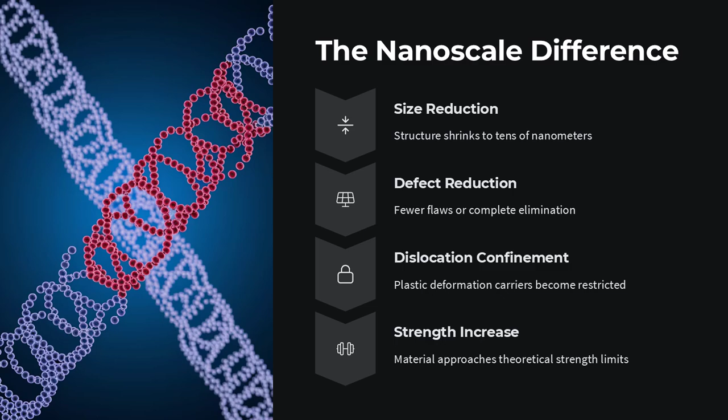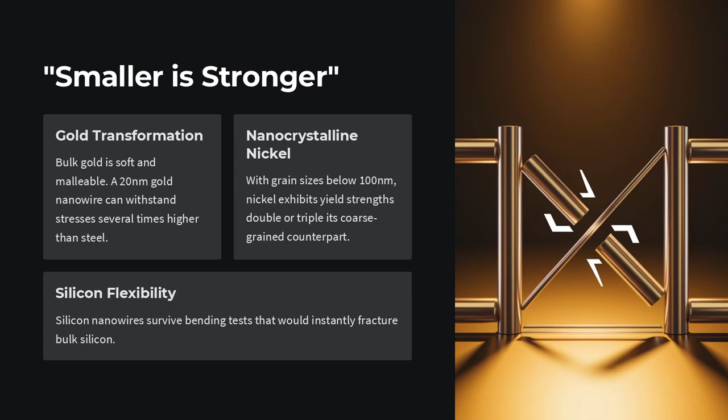But when you shrink materials down to the nanoscale, something remarkable and paradoxical happens. They get stronger, much stronger. In fact, nanostructured materials can exhibit mechanical strengths approaching their theoretical limits, far beyond what bulk versions of the same material can achieve. This puzzling phenomenon is known as the size-dependent strength paradox.

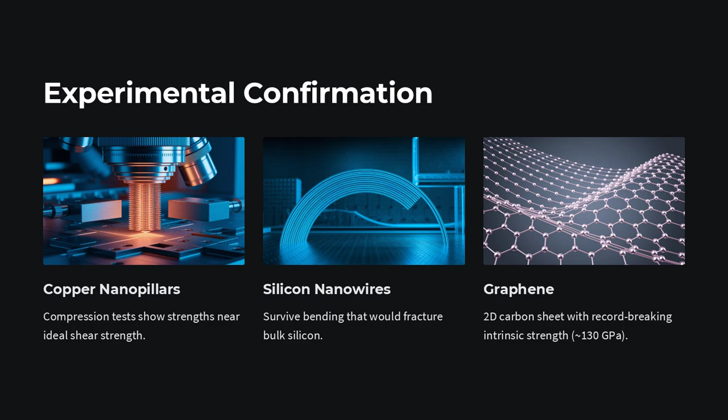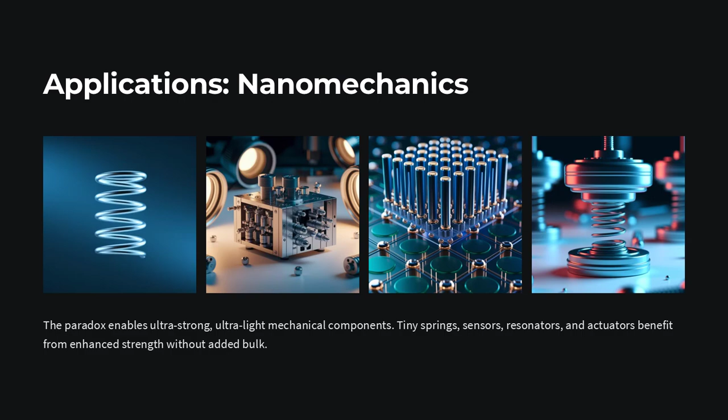Let's take a step back. In classical material science, we expect larger samples of a material to behave predictably, but in practice, larger materials often fail far below their theoretical strength. Why? Because of defects, dislocations, grain boundaries, microcracks, and voids. These imperfections act as weak points, places where stress concentrates and fracture begins. The bigger the material, the higher the chance it contains a critical flaw.

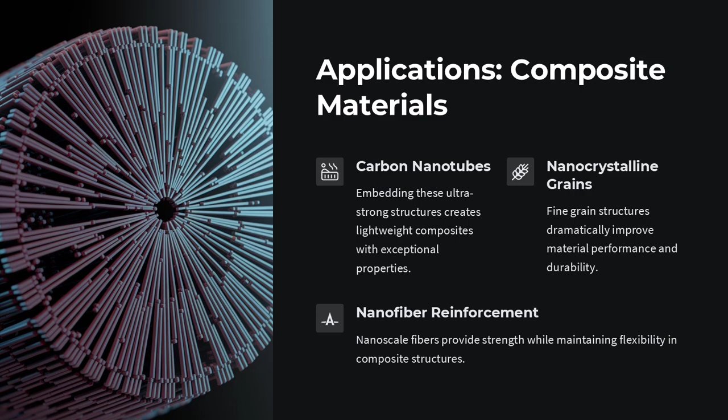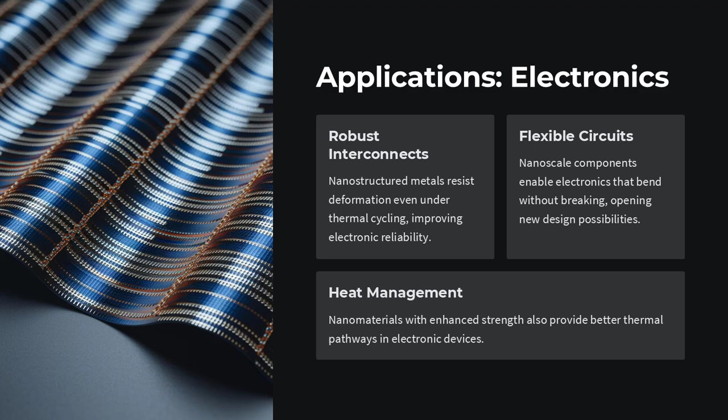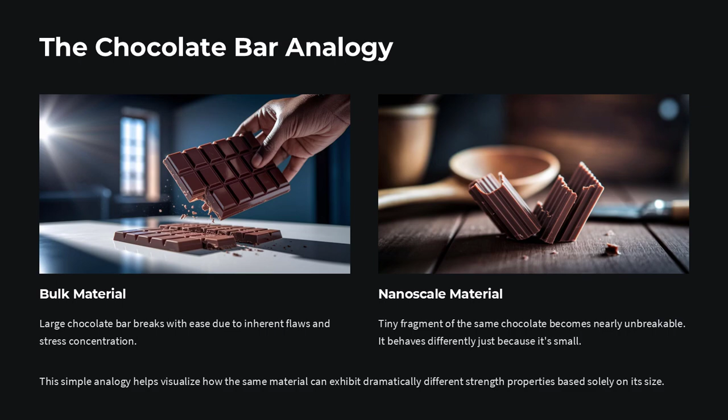This is why, for example, a perfect silicon crystal might withstand extreme pressures, while a large silicon wafer can snap from much less force. But now zoom in, way to nanostructured materials, nanowires, nanopillars, thin films, or nanocrystalline metals. As the size of these structures approaches a few tens of nanometers, something profound changes. The density of defects decreases, or they're removed entirely.

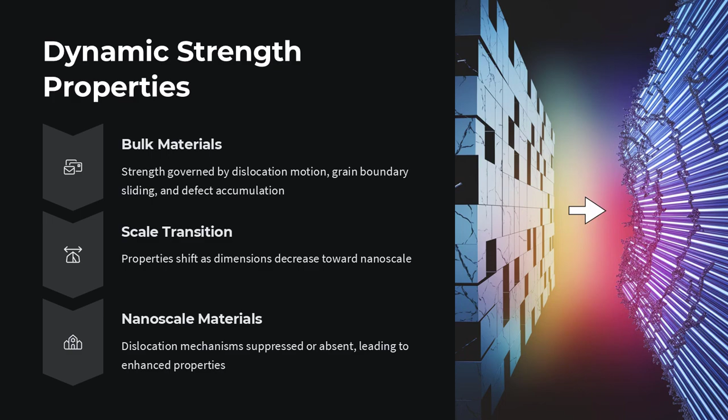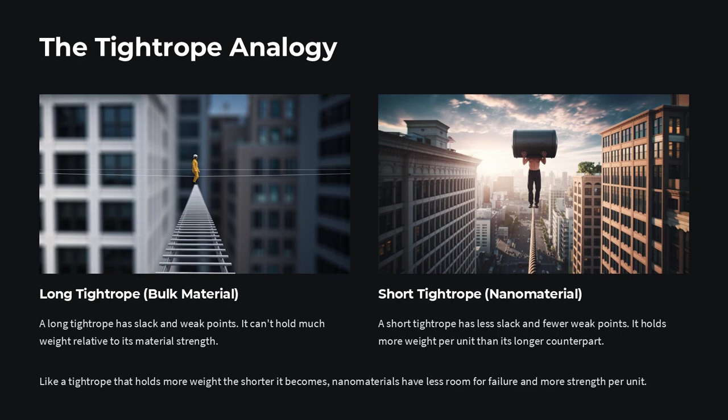Dislocations, the main carriers of plastic deformation, become confined, unable to move freely or even form. Grain boundaries may shift from being weak points to barriers that block dislocation motion, strengthening the material. This leads to a stunning result: smaller is stronger.

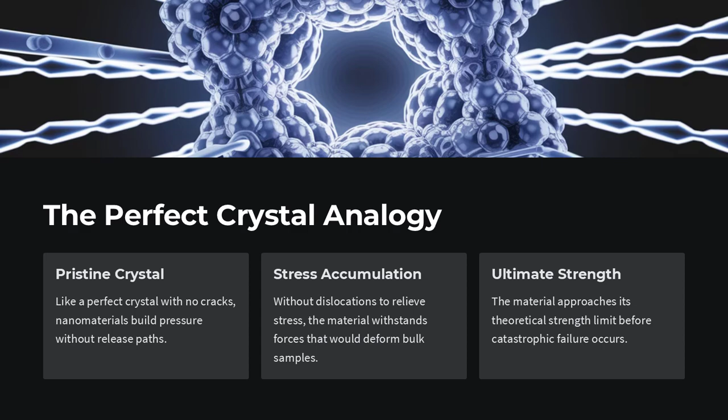Take gold, for instance. In bulk, gold is famously soft and malleable. You can dent it with a fingernail, but fabricate a gold nanowire just 20 nanometers thick, and it can withstand stresses several times higher than steel.

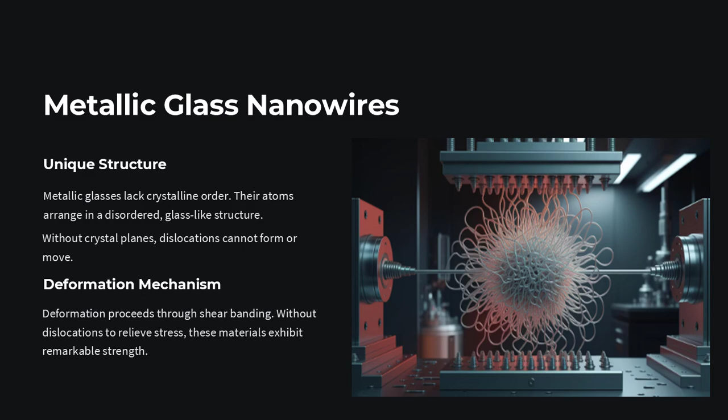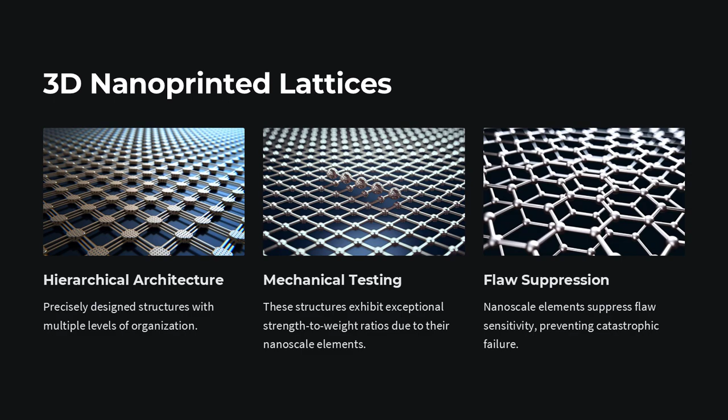Or consider nanocrystalline nickel, whose grain sizes are less than 100 nm. It can exhibit yield strengths double or triple that of its coarse-grained counterpart. These observations don't just challenge our intuition, they upend conventional design rules.

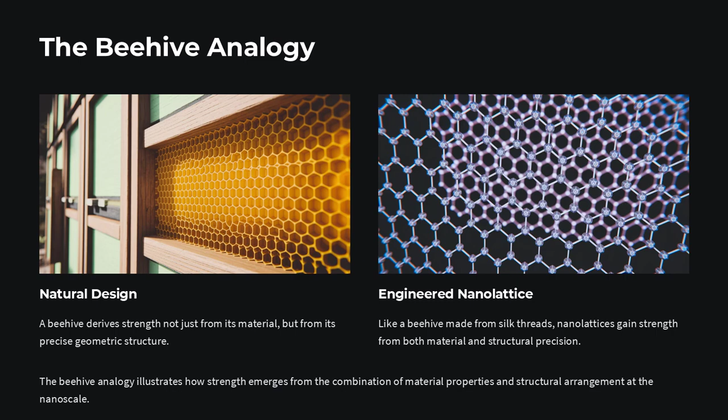You might ask, but shouldn't these scaling effects be predictable? Why do they seem to contradict bulk theory? Here lies the heart of the paradox.

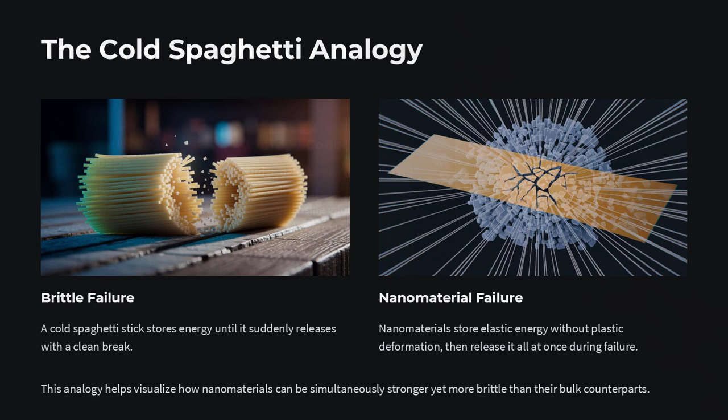Classical mechanics, including continuum elasticity and plasticity, assumes a homogeneous material full of statistically distributed defects. But nanoscale materials often have too few defects for these statistical models to hold. Instead of behaving like a material, the structure starts behaving like a system with discrete atomic behaviors.

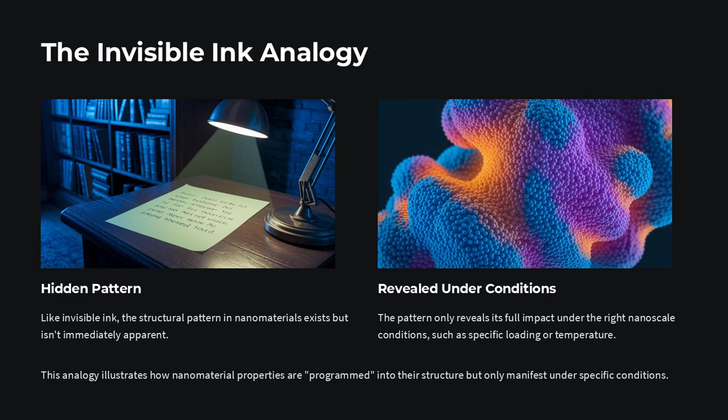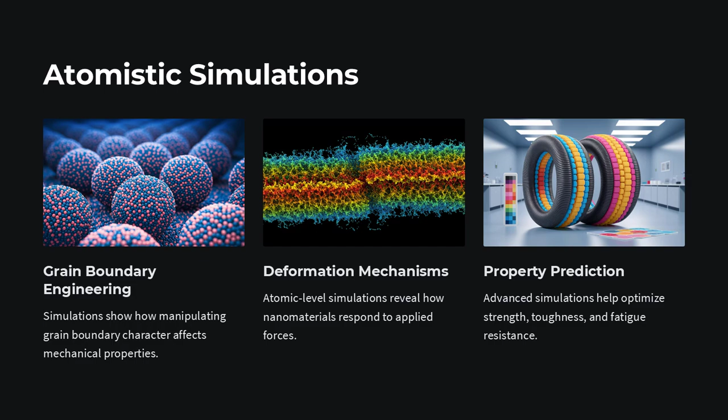Dislocations may not be able to form, or if they do, they might be pinned, blocked, or annihilated at surfaces. In essence, the material is too small to fail the way big materials do.

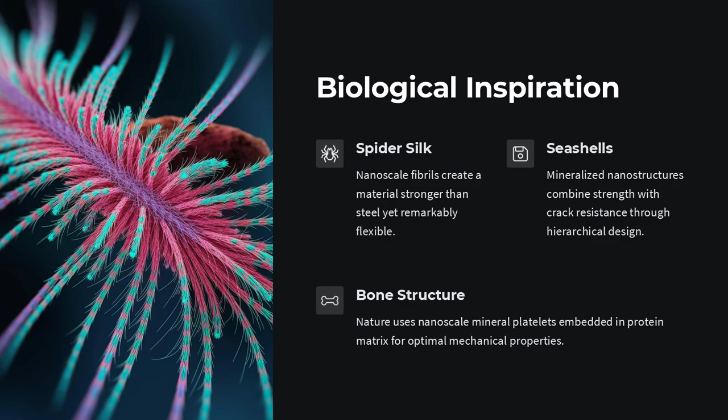And surfaces matter a lot. At the nanoscale, the surface-to-volume ratio becomes enormous, and surfaces are often more ordered, strained, or chemically distinct than the bulk. This can lead to surface hardening effects, especially in materials with strong surface reconstructions or oxide layers. Combined with size effects, the result is a suppression of plasticity and an increase in hardness and strength.

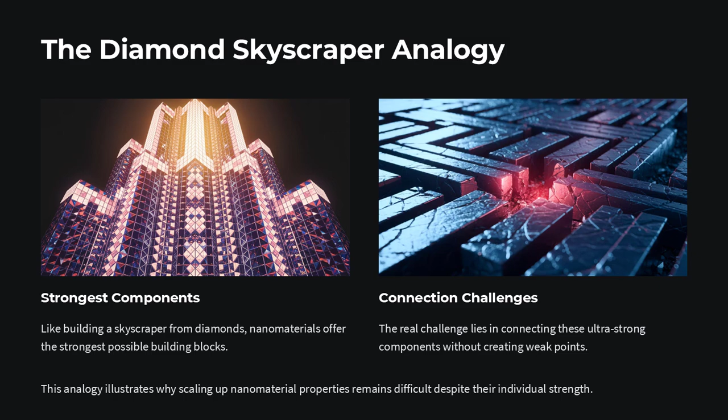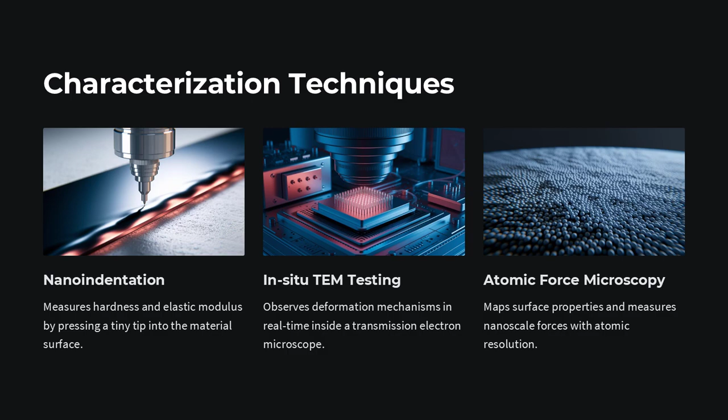Interestingly, the size-dependent strength paradox has been experimentally confirmed across a wide range of materials. Nanopillars of copper and nickel showing strengths near their ideal shear strength. Silicon nanowires surviving bending tests that would fracture bulk silicon. Graphene, a 2D sheet of carbon atoms, exhibiting record-breaking intrinsic strength, approximately 130 GPa, despite its atomic thinness.

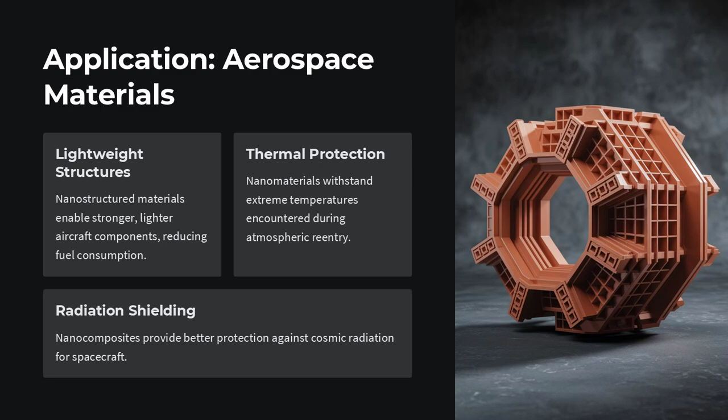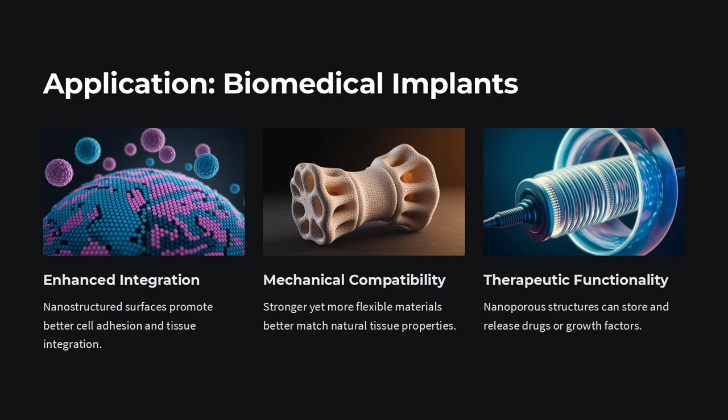Yet this increased strength often comes at a cost. Many nanoscale materials are strong but brittle. They can resist enormous stress but then fail catastrophically with little warning. In bulk, materials can absorb and redistribute stress via dislocation motion or plastic deformation. At the nanoscale, with dislocations suppressed, there's no escape valve for stress.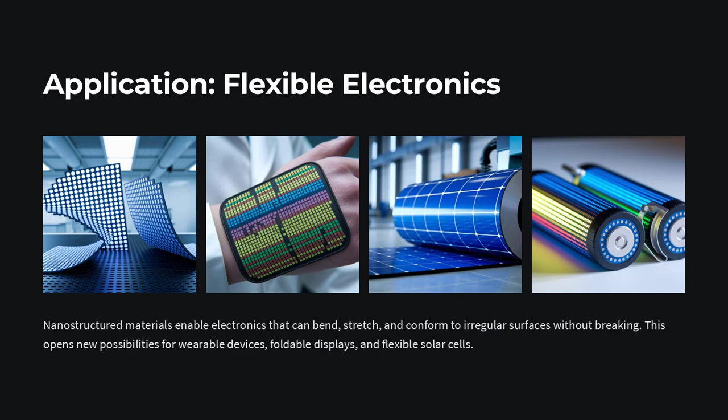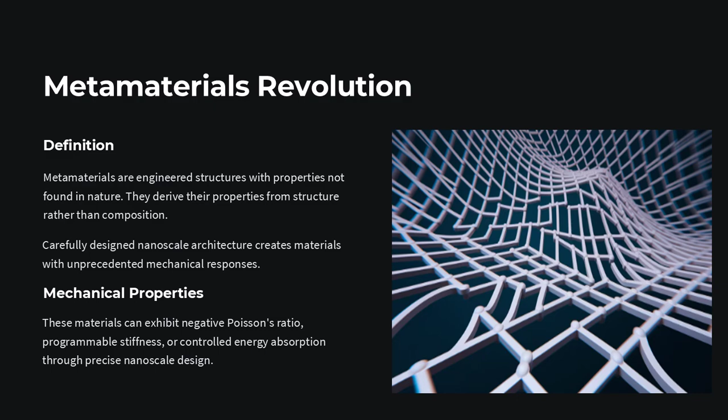So what does this paradox mean for applications? In nanomechanics, it opens the door to ultra-strong, ultra-light components, tiny springs, sensors, resonators, and actuators. In composite materials, embedding nanoscale reinforcements like carbon nanotubes or nanocrystalline grains can dramatically improve performance.

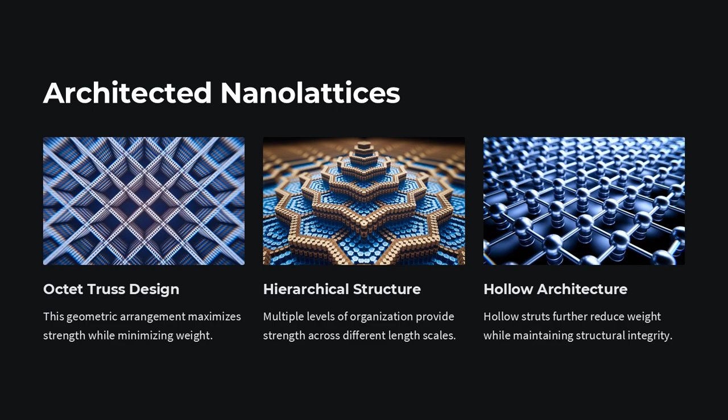In electronics, nanostructured metals can be used as interconnects that resist deformation, even under thermal cycling. And in biomedicine, nanoscale needles, stents, or scaffolds benefit from enhanced strength without bulky geometry.

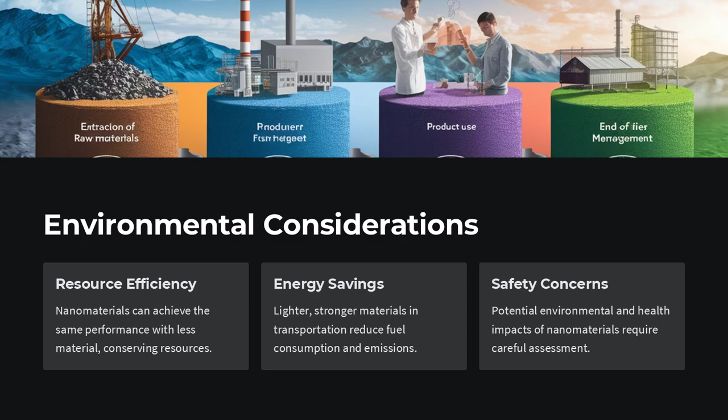But there's also a challenge. Designing at the nanoscale means rethinking the assumptions of traditional materials science. Engineers must consider how defect dynamics, surface energies, grain orientations, and dimensionality all interact to create properties that are nonlinear, non-intuitive, and often spectacular.

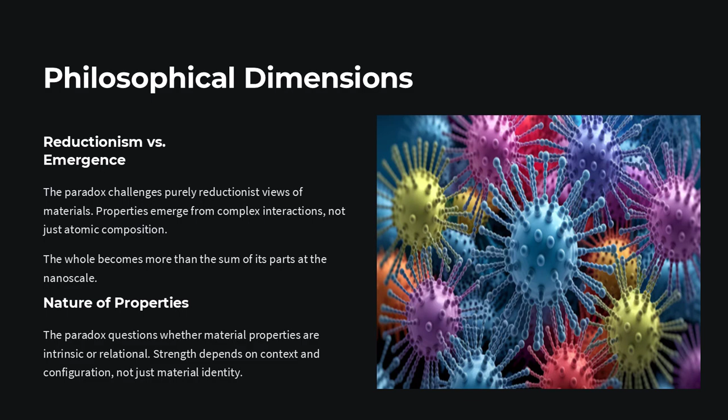And perhaps that's the deeper insight of the size-dependent strength paradox, that strength isn't just about what a material is, it's about how it's structured and how big it is. At the nanoscale, materials transcend their classical identities. Gold becomes stronger than steel. Silicon bends, crystalline perfection becomes attainable.

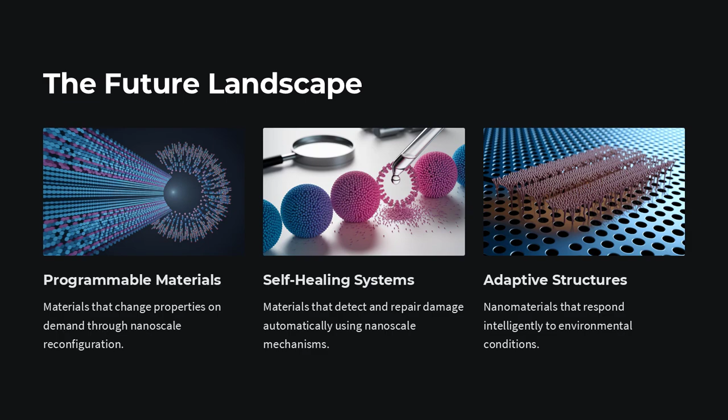In the end, this paradox doesn't just challenge our models, it invites us to reimagine the limits of what materials can do by designing from the atom up, because sometimes when it comes to strength, less is truly more.

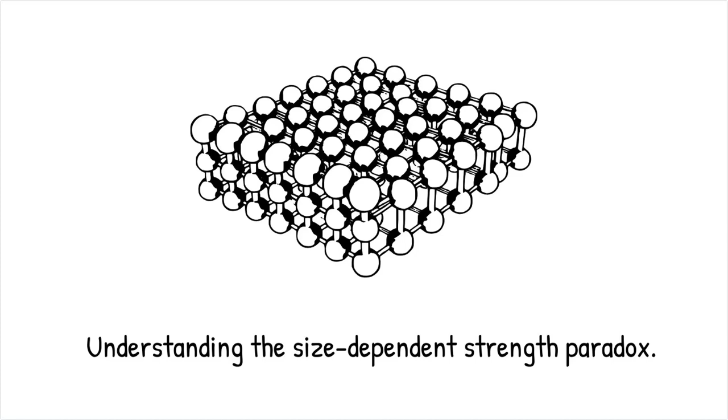The size-dependent strength paradox refers to the counterintuitive phenomenon where materials, when reduced to the nanoscale, exhibit mechanical strengths that far exceed predictions based on their bulk properties, as classical continuum mechanics suggests strength is an intrinsic material constant. However, as characteristic size shrinks below the micrometer or nanometer scale, materials approach their theoretical strength limits. Nanowires made of gold or copper can exhibit strengths exceeding their macroscopic counterparts by more than an order of magnitude, much like breaking a large chocolate bar with ease, while a tiny fragment of the same material is nearly unbreakable due solely to its small size.

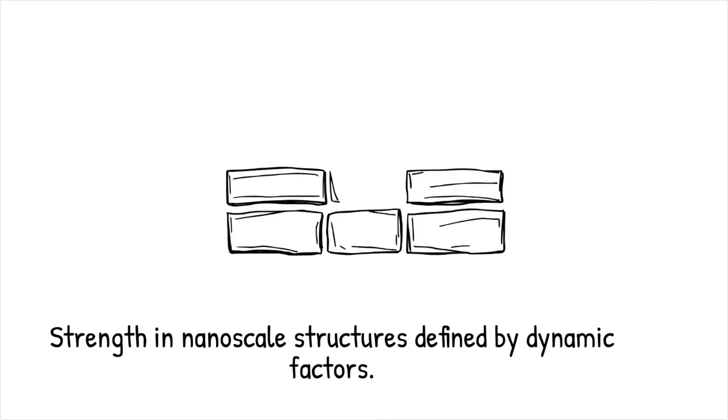At small scales, mechanical strength is not merely a bulk average property, but a dynamic outcome influenced by defects, dislocation motion, and surface effects. In bulk materials, strength is governed by dislocation initiation and propagation, grain boundary sliding, and defect accumulation. In nanoscale structures, these mechanisms are suppressed, leading to enhancements in yield strength, fracture toughness, and elastic modulus. Nanopillars fabricated via focused ion beam milling exhibit higher yield strengths with smaller diameters, reminiscent of a tightrope that holds more weight the shorter it becomes, where less slack means less room for failure and greater strength per unit.

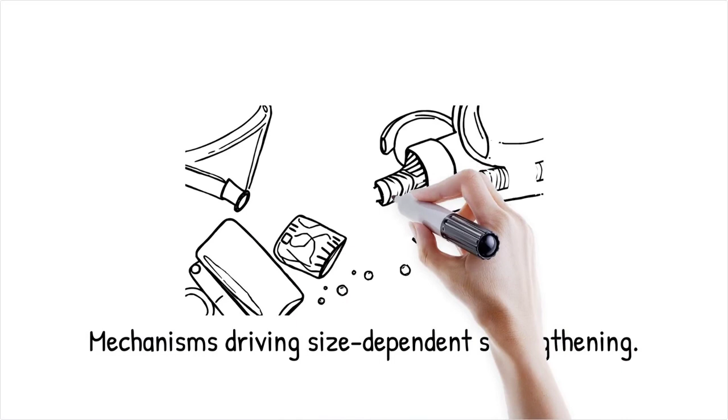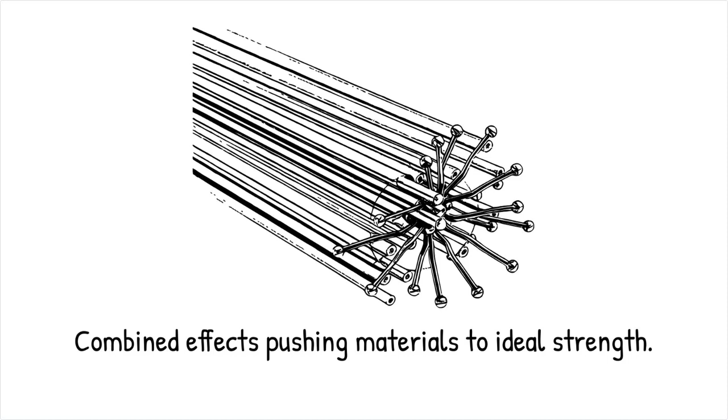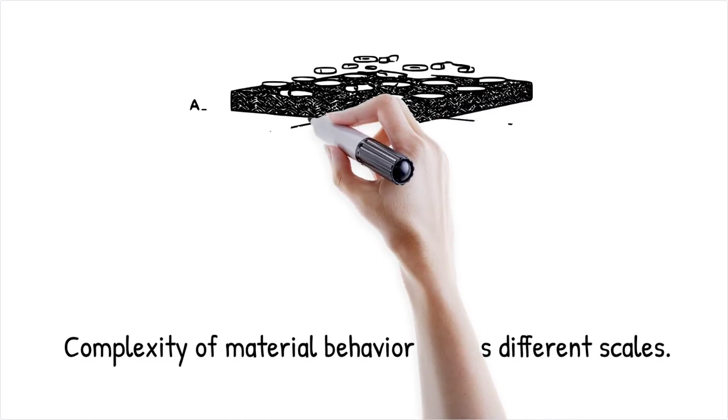The enhancement in strength at the nanoscale arises from mechanisms such as dislocation starvation, surface-dominated mechanics, constrained plasticity, and limited defect nucleation. In extremely small volumes, dislocations cannot multiply or propagate easily, resulting in dislocation exhaustion or source-limited deformation, and the increased surface-to-volume ratio amplifies the influence of surface energy, pushing the material closer to its ideal strength. Metallic glass nanowires can exhibit high tensile strength because their deformation occurs through shear banding without usual dislocation mechanisms, similar to a pristine crystal without cracks, where pressure builds relentlessly, making the material appear unnaturally strong. This paradox highlights the breakdown of continuum assumptions at the nanoscale, where new rules of behavior emerge.

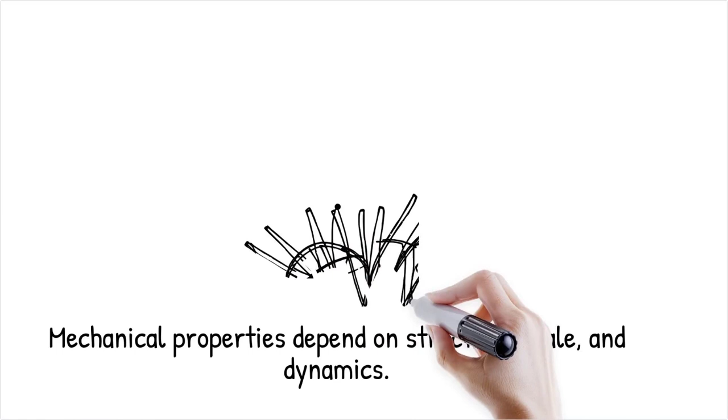The interplay between structure, scale, and intrinsic material dynamics means that mechanical properties are not absolute but result from complex interactions. Nanolattices created via 3D nanoprinting exhibit high stiffness and strength-to-weight ratios due to their hierarchical architecture and nanoscale elements, much like a beehive constructed from silk threads whose strength is derived not only from the material itself, but from the precision and scale of its construction.

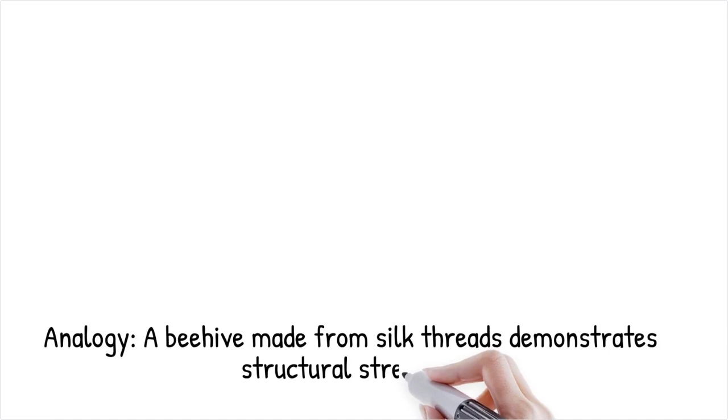At the nanoscale, the energy landscape for deformation and failure is dramatically altered, with fewer dislocations and limited defect accumulation, resulting in higher energy barriers to plastic flow. Energy that would otherwise be absorbed by defect motion is instead stored elastically, or released catastrophically upon fracture. In nanocrystalline metals, the traditional Hall-Petch relationship breaks down at very small grain sizes because grain boundary sliding becomes dominant, changing energy dissipation pathways, akin to snapping a cold spaghetti stick that stores energy until a sudden, clean break occurs.

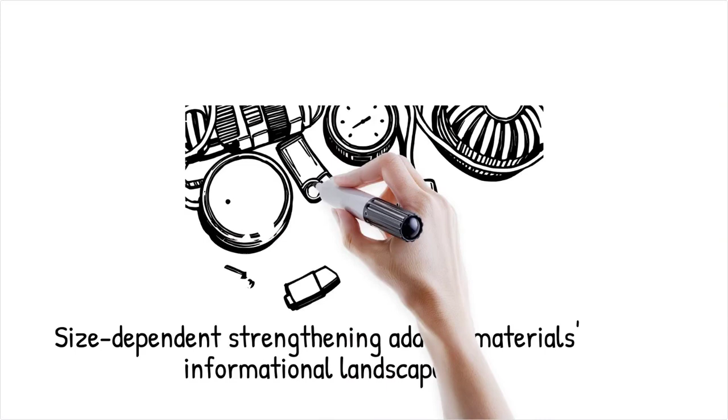Size-dependent strengthening also introduces new dimensions in the informational landscape of material science, where mechanical performance is encoded in geometric, structural, and compositional parameters. Atomistic simulations of nanocrystalline alloys demonstrate that by strategically manipulating grain boundary character, it is possible to optimize strength, toughness, and fatigue resistance, effectively programming the material's behavior, much like writing a message in invisible ink that only reveals its full impact under the right nanoscale conditions.

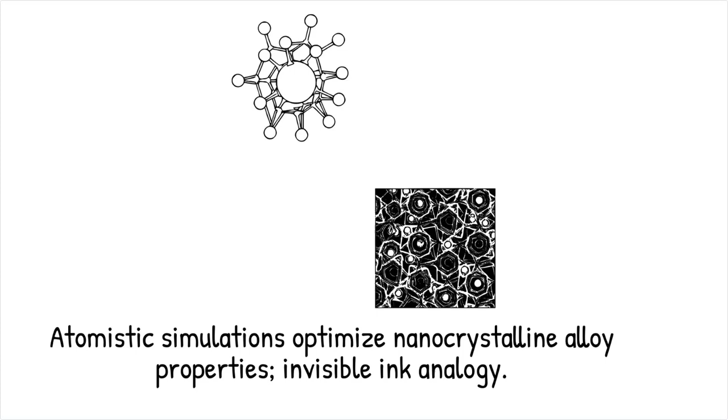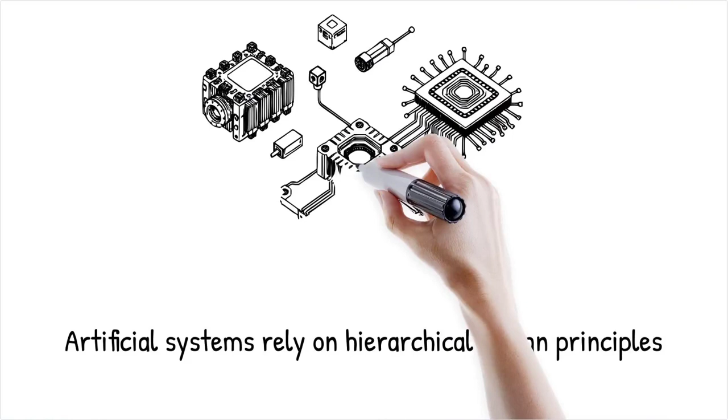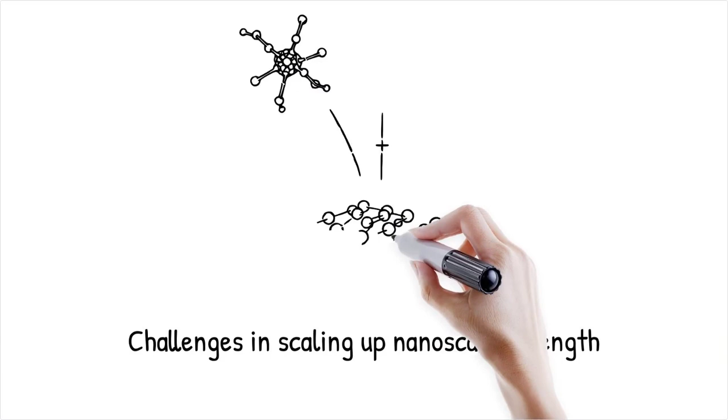Biological systems routinely exploit size-dependent mechanics for functionality, as seen in the nanoscale fibrils in spider silk or the mineralized nanostructures in seashells and bones, where hierarchical design combines strength with flexibility. The enamel in human teeth achieves remarkable hardness due to its nanoscale structure of aligned apatite nanorods that resist deformation through confinement, analogous to a suit of armor made of feathers, where each tiny component is weak alone, but together creates a protective shell far stronger than expected.

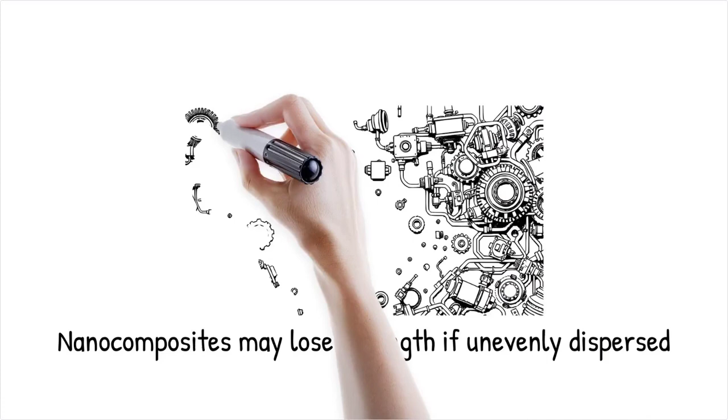Despite the remarkable potential of nanoscale materials, significant challenges remain in scaling up these properties for real-world applications. Nanocomposites may lose their strength advantages if nanoscale reinforcements are unevenly dispersed or if weak interfaces develop during processing, much like trying to build a skyscraper out of diamonds. The individual building blocks may be the strongest available, but connecting them without introducing weak spots is a formidable challenge.

The future of materials engineering lies in exploiting the size-strength paradox through innovations in bottom-up fabrication, nanomanufacturing, and machine learning guided design. Emerging research in metamaterials and architected nanolattices shows that by carefully tuning geometry and scale, it is possible to achieve theoretical strength limits in practical components, much like constructing superstructures with Lego blocks made of steel arranged with nanometer precision, thereby creating materials that are stronger, lighter, and more functional than those produced by traditional methods.